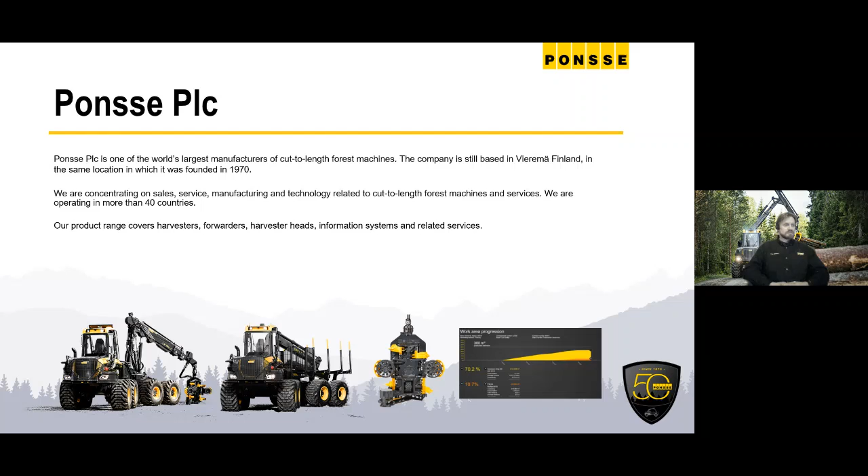I will shut my camera at this point so you will get the full focus. We're a 50-year-old company, and through all our history we have focused only on CTL forest machinery. That's all we do, and that's where we excel. We are one of the biggest CTL machine manufacturers in the world, actually. So big influence - we operate in about 40 countries worldwide. Wherever there is industrial logging, we are pretty much there. Service, sales, manufacturing, and all kinds of technology related to CTL forest machines and services.

So that's our background. Our product range covers harvesters, you can see on the left hand side, a wide range of harvester models. Then forwarders, harvester heads, and also a big selection of computer applications and software products for different kinds of use. That's obviously important in the modern world to support information technology.

Then the actual topic, Ponsse firefighting equipment. Basically, we're talking about a forwarder-mounted fire suppression device that utilizes the excellent features of a Ponsse forwarder. We're mounting this external firefighting equipment on a standard forwarder. The design has been done in close cooperation with the local Department of Emergency Services, firefighters here in Finland, and actually the idea came from them - they needed something to tackle the problem of fighting wildfires in forests in difficult terrain. And here we have the solution now.

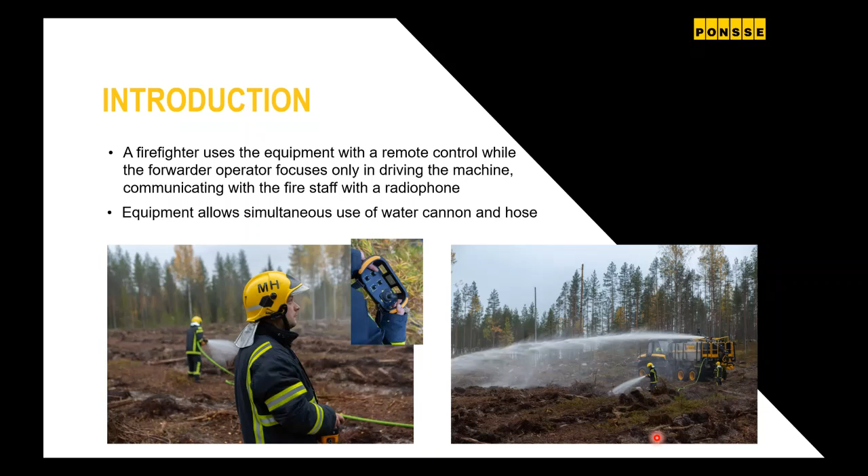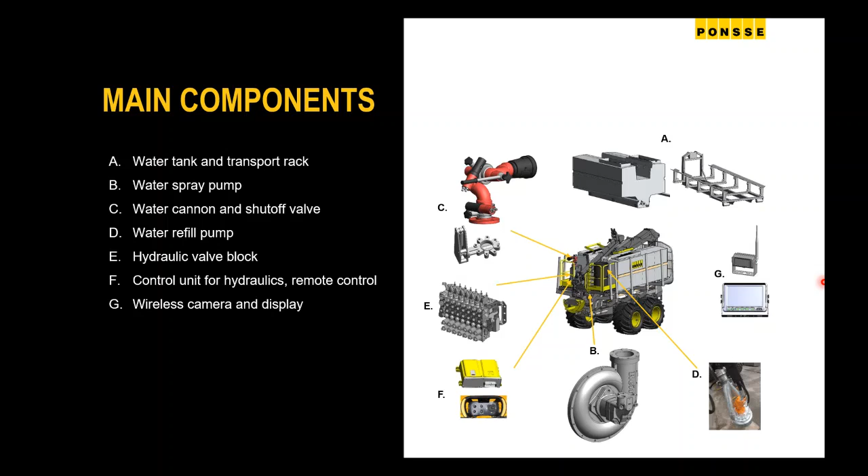Available base machines for the unit are Ponsse Buffalo, Buffalo King, Buffalo Active Frame, so all models of Ponsse Buffalo, plus Elephant and Elephant King, including all optional models like Active Frame. Loader minimum is Ponsse K90 Plus, or the older Ponsse K90 loader or a bigger one, since you need enough power to lift it on top of the load space.

Hydraulic system requirements: oil flow minimum 100 liters per minute or 26.5 gallons per minute, pressure minimum 235 bar or 3,410 psi, and minimum load space width is 2.76 meters or 108 inches. That's the minimum load space of the Buffalo, so it fits all the different optional load spaces.

Esko, if you have any comments, please fill in whenever you need. And we're not... sorry. Now I have a voice.

Yes, the Bison. You don't see the Bison on the list, and the reason is that the Bison has a different type of hydraulic system and needs to be checked first, our R&D is working on that all the time. Maybe a bit later it will be possible to install, but not yet today.

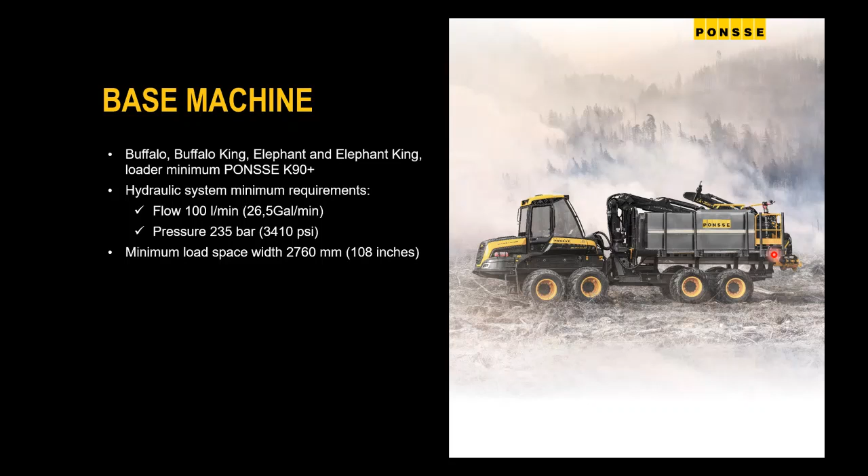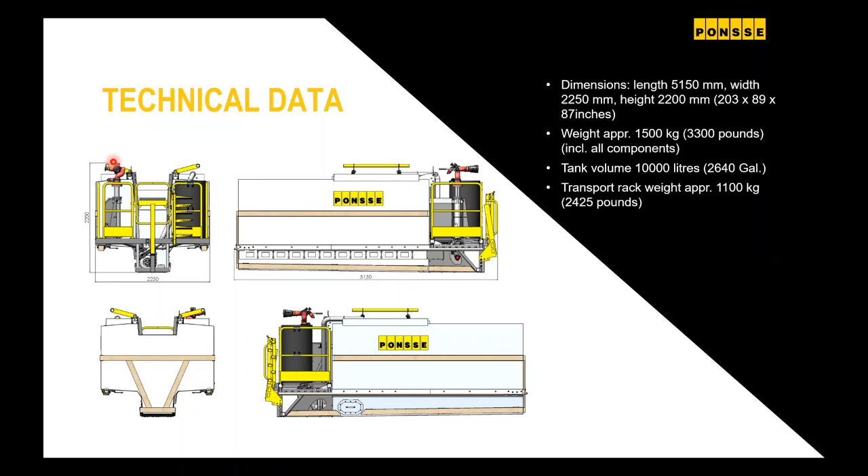This readiness kit is available from the factory as an option for a forwarder. When ordering a new forwarder, you can order it with this readiness, so it will have all the connectors needed for the firefighting equipment. For existing machines, you can buy a kit from Ponsse spare parts, which is easy to mount, making it very easy and fast to attach the unit. It takes approximately 10 to 15 minutes to mount the tank and connect it to the hydraulics and electrics, and then it's ready to work.

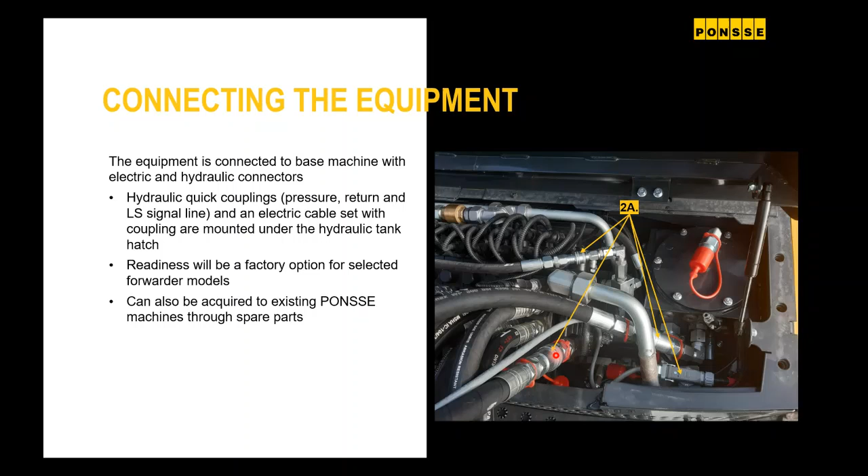The capacity of the tank is 10,000 liters. It's built out of lightweight aluminium, so it's possible to lift it onto the load space with the own loader of the forwarder. It needs some lifting power, but we have it in the Ponsse K90, which is the smallest loader you can get in the Buffalo. So with the Buffalo, you will be okay.

This is a special aluminium. It can withstand chemicals and even salt water, seawater, if you're using that. There's different qualities of aluminium, and this is one of the good ones.

It's reinforced with baffle plates and reinforcement plates from inside, making the structure significantly stronger. Also, when driving with that huge amount of water in uneven terrain, it's good to have the baffle plates so the water is not moving around and splashing in the tank, causing swaying and stresses for the system.

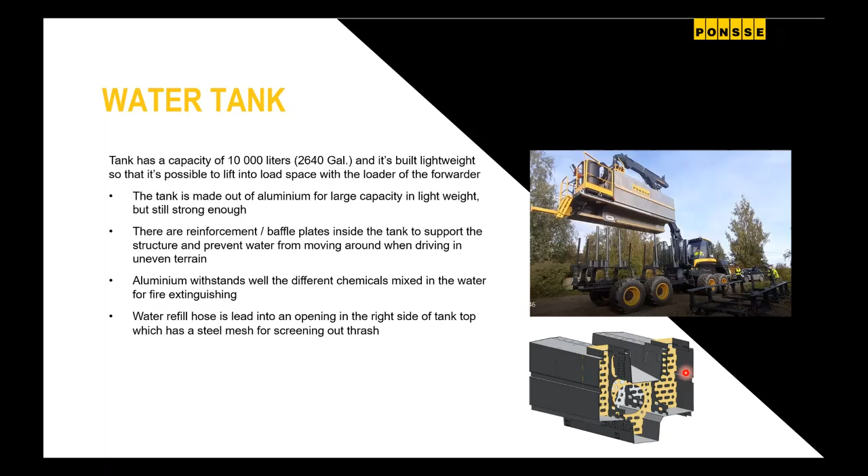The water refill hose is led into the big opening on the right side of the tank top, and there's a steel mesh - I have a better picture of that coming later - screening out the biggest trash, moss or stuff like that. Here we have a picture in the bottom right corner. There are big gaps or openings on both sides of the tank for refilling. There might be other methods of refilling the tank occasionally, so it's good to have these big openings.

The built-in refill pump uses a pipe coming in over here to the right side gap, and there's a steel grid or steel mesh screening out the bigger junk.

It can be drained empty through a valve in the rear, down here, the yellow one - there's a big tap. You can open it and drain the tank empty when needed, for example for transportation, or maybe you're cleaning it. It can be flushed clean by opening the screening grid over here and spraying it with water, hosing it clean, then opening the tap and letting the impurities and dirty water flow out.

When the equipment is stored, it's good to cover the openings on top with some cover, maybe plywood or whatever means, so that no impurities go into the tank during storing, especially if you're storing it outside. It would be really advised to close the hatches.

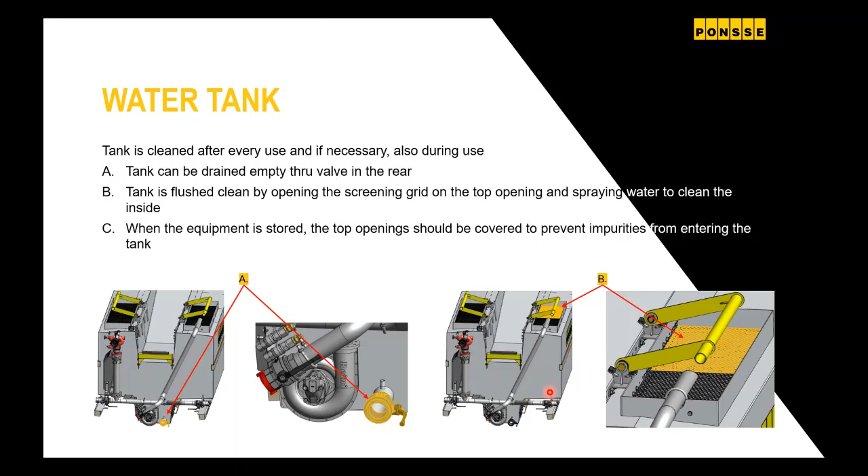Then the spray pump - this is the pump spraying water into the water cannon and to the hoses if those are used. Built in Finland by Reini company, model PP3 centrifugal impeller pump. Maximum flow is 950 liters per minute, 250 gallons per minute, and maximum pressure is 14 bar, but typically we use lower pressure depending on the water cannon nozzle setting.

The pump is run by a hydraulic motor that takes power from loader hydraulics, so we have very powerful hydraulics backing up the operation. It's a Parker F11 series 10 cubic centimeter piston motor, very widely used, robust, really powerful motor, used for example in harvester saw units.

Maximum pressure is 350 bars or 5080 psi. We are using loader pumps with maximum pressure of 265 bar or 3840 psi, and oil flow maximum is 102 liters per minute, 27 gallons per minute - easily enough in the forwarder that we are using.

The spray pump is corrosion resistant, so you can use seawater, salt water, or the typical chemicals that might be used for firefighting. When it's not in use, it's important to protect the pump from freezing, so there are good instructions in the user manual for doing that.

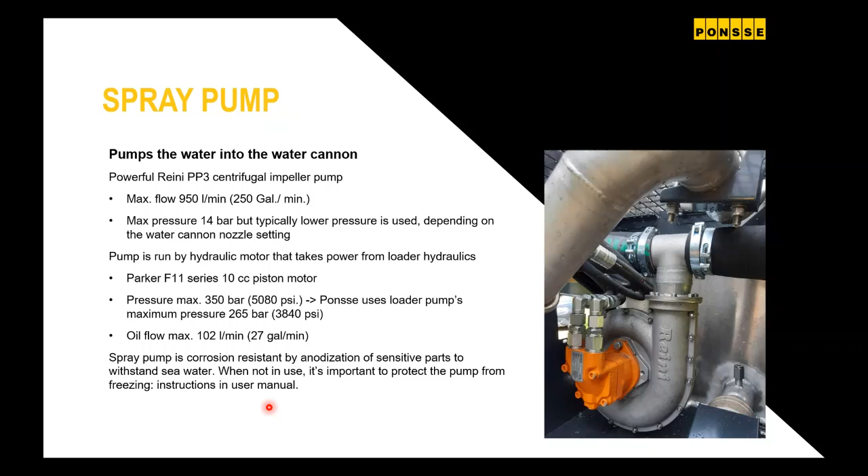Then the water cannon - like I said earlier, it's purpose-built for firefighting. Hydraulically controlled TR75 SHK, also built here in Finland. High quality pump, and all the functions except the choke in the nozzle are operated hydraulically with a remote control. We have hydraulic actuators for turning and the elevation angle of the water cannon, as well as the nozzle setting, so you can spread the spray form from point jet to mist function with the remote control. Basically you can do everything needed in normal firefighting work with the remote control.

If you see on this show your pointer, there's rotating hydraulics and the height hydraulics. Here is the actuator for rotation, then here for elevating up and down the nozzle, and this one for adjusting the nozzle for different forms of the jet or the spray.

I'll show in the coming pages the nozzle setting, the choke, but depending on that position, the spray range of water has been in our tests between 35 and 47 meters, so 38 to 51 yards - a very long range that you can reach with the point spray. You can really effectively use this from a clear distance from the fire, staying safe almost 50 meters away.

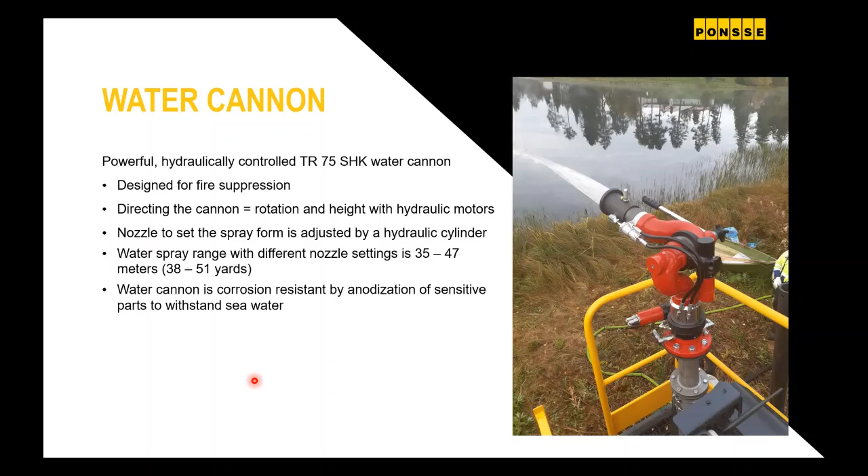The nozzle setting is hydraulically operated and sets the form. So point jet obviously reaches much longer distance, and then the spray like this, like a mist setting, you can create for example a protective mist to protect from the heat of the fire.

Here's the nozzle choke. There are 3 different positions. You can see here it says the settings in liters per minute and gallons per minute for every setting. That's making the choke narrower or wider, and that affects the pressure of the water flowing out, which affects the range but also the amount. So a smaller amount of water but longer reach with a tighter choke, and more water with a little less range with a wider choke.

This left picture shows very well - if you go back to these spraying areas, spraying very close to the machine means like a water wall between the fire and the machine, and this works to decrease the temperature near the machine very well.

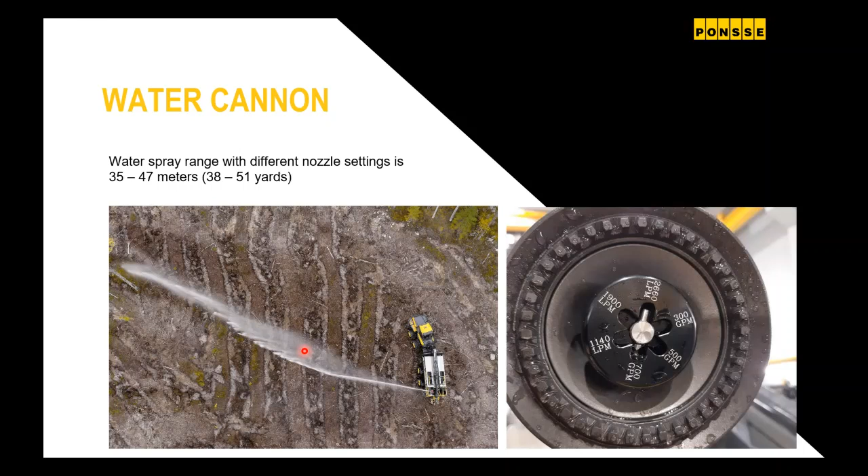Then refilling - maybe the most typical way of refilling is with the own built-in refill pump, manufactured by Reini Model S1, powered by the base machine's work hydraulics like the spray pump also.

Filling takes about 6 to 7 minutes depending on the height, even though the maximum flow in optimal conditions of the pump is 3,000 liters per minute, and we have a 10,000 liter tank, but it's always the length of the hose and the lifting height of water that affects it. So in normal conditions, it's been about 6 to 7 minutes.

You can refill it from a natural water source like a lake, pond, river, spring, whatever is available. Or of course, we'll show later if you supply water in different kinds of tanks or trucks.

There's a lifting bar for the pump, so you lift it into the water source with the grapple and the loader of the forwarder. It's a submersible centrifugal pump run with a hydraulic motor, and this pump is actually quite insensitive to impurities, mud, or even sand - they go through it really well.

It's actually the same pump that's also used for dredging, pumping soil from the bottom of water, so it can really do it. But in this operation, it's advisable to hold it a little bit clear from the bottom with the loader. It's really easy to adjust the height with the loader, so you can lower it, find the bottom, and lift it up a little bit so that it's not sucking the impurities and dirt from the bottom of the water. That keeps the water cleaner and protects the spray pump.

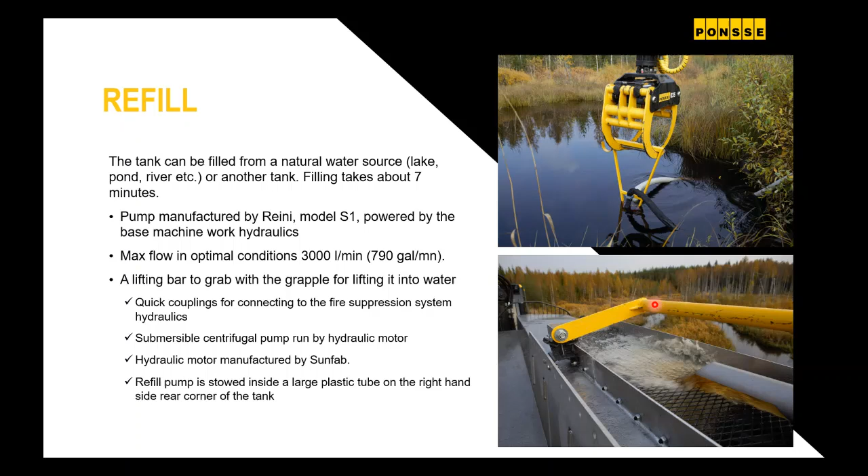And here in the back of the tank, there's a black plastic container where you can stow the pump and the hose when it's not in use, and from there you lift it with the grapple and place it in the water. Obviously, quick coupling for the hose on the back side of the tank over here, where you connect the hose for refilling.

And then there's a strainer basket in the bottom, you can barely see it from this picture, in the bottom of the pump. So this is protecting from impurities and sand and mud entering the input hose and the pump. But like I said earlier, it's still good to hold it away from the bottom, and it's easy to do so with the loader.

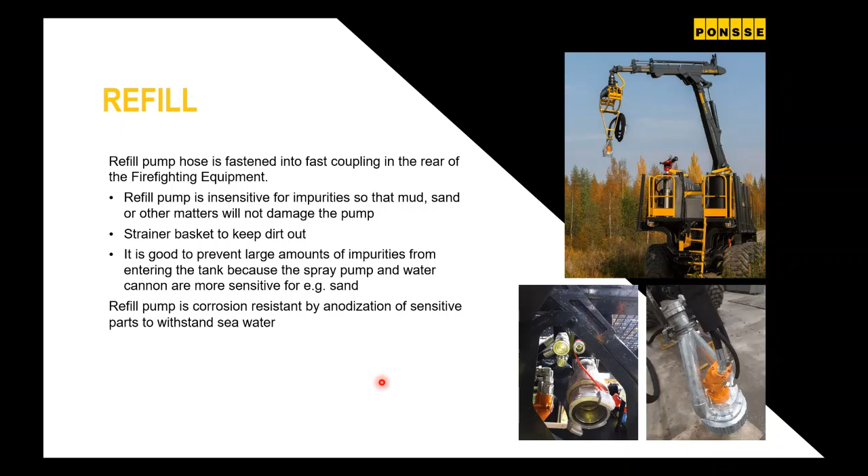Also, this pump is corrosion resistant, so it's insensitive to seawater or chemicals. The other possibility, of course, is to refill from a tank.

So you can bring water to the fire site with a fire engine or any other tanker, or of course you can also lower tanks and place them in the ground. So it's possible to refill this also with the pump of the fire engine. Then you just connect the hose to the refill connector in the back and pump the water in.

It's good to understand that the refill is quite fast, and even driving in difficult terrains is fast with this kind of special equipment. We have a machine that's purposely built for effective driving in all kinds of terrains.

And then the spray pump is very effective. So especially if you're using both the cannon and one or two hoses, emptying the tank is really fast also. It might take only 10 minutes. So we could have a cycle of only, let's say, 30 minutes for emptying 10,000 liters of water.

So in very intensive use, you really need a lot of water supply available if you want to be effective. If there is no natural water source, you need a lot of water transported to the site to fully utilize the capacity of this system.

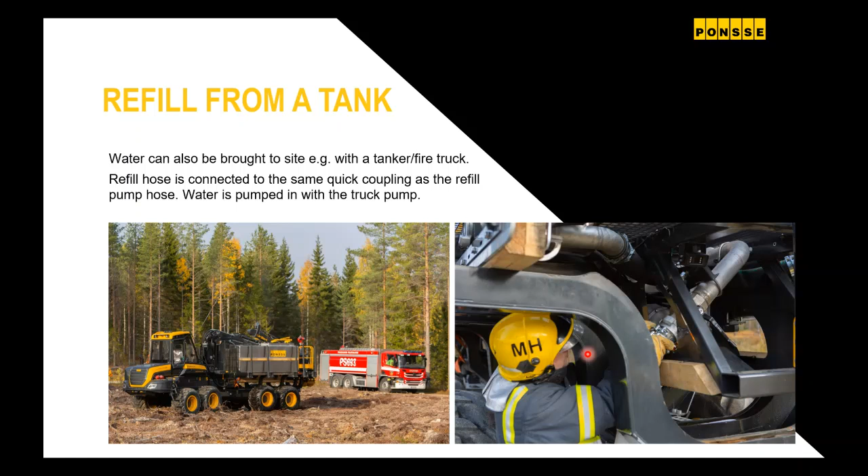Hydraulic valve, again in the back of the tank, in the rear, directional valve block to control the fire suppression system functions. All of them are operated hydraulically. It's a Parker L90 load sensing 7-spool valve block with individual maximum pressure settings for all the functions.

And pressure, tank and load sensing lines are connected with quick couplings in the base machine, and then electric connection too, and that's all the connections needed.

Obviously the tank is tied to the base machine with a steel chain, so it's secured into the load space that way. And the hydraulic connectors are impossible to connect wrong, because the pressure and tank lines are the opposite way around, the male and female connectors, and then the load sensing line connector is smaller, so there's only one way you can connect these.

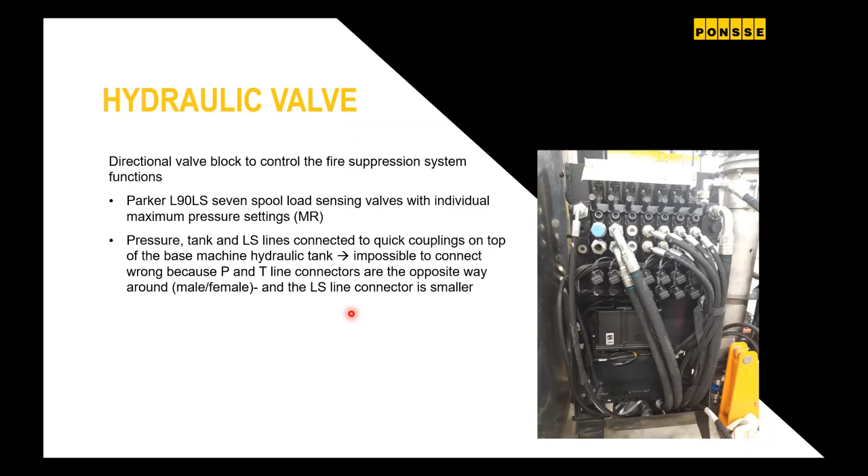And then the control module, which is located right under the valve block to minimize the wiring, so it's basically a reliability thing right there. This unit controls all the functions of the system, so the hydraulic functions. Manufactured by Teleradio, a Swedish manufacturer, powered by the base machine's 24-volt electric system.

Well protected inside the casing, as you can see here.

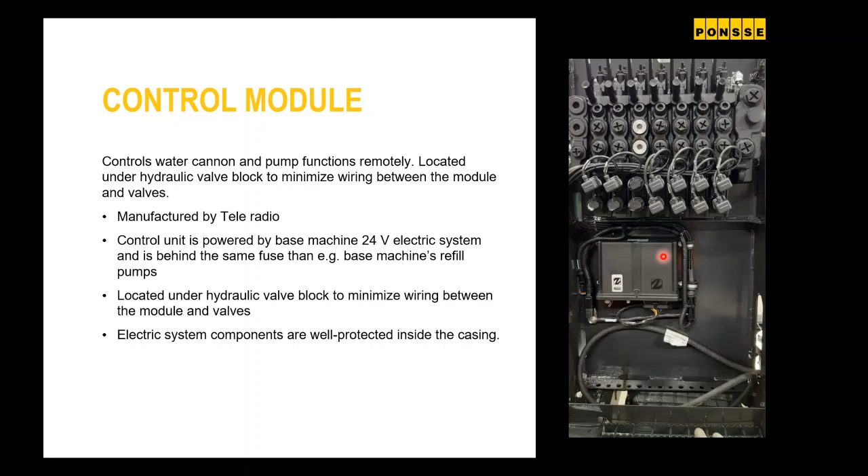And then the remote control, same manufacturer, Teleradio, Swedish built, really simple and easy to use. You have a strap, you can hook it around your neck and then hang it in front of you and operate it with both hands.

And switches are here, this knob for refill pump, then spray pump, and those are turnable knobs so you can adjust steplessly the flow of the pumps. Then there's a joystick, you can see better from this picture, for aiming the water cannon. Really easy and logical. Then nozzle adjusting with 2 buttons at the end.

Water valve control with this one here, so this shuts the valve or opens it to the water cannon. Stop button at the end, so you can stop the whole system with this main switch over here.

And then you have a small display showing the status of connection and the battery and so on in front of the unit. It operates at 2.4 gigahertz frequency, same as Wi-Fi, basically like a Wi-Fi connection.

Range is 100 meters, and there's a rechargeable and changeable battery. It's really easy to change a new battery. The manufacturer has estimated that in intensive, non-stop use, the battery basically lasts up to 8 hours. So it's really long operating battery.

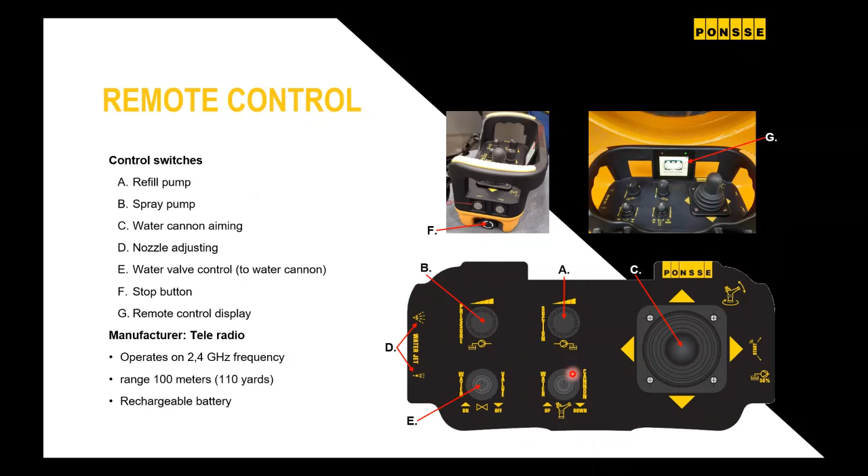The remote control and the control unit, the base machine unit, are paired, like you pair your smartphone with your car, for example, so that if there's another similar system, remote control, used in the same area, in a close area, they don't affect each other. So you can operate a number of Ponsse firefighting equipment remote controls in the same area, and they don't interfere with each other.

If there is a lot of radio traffic on the same frequency in the area, like a strong broadcast all the time, compromising this communication, then the system would automatically shut itself down. But this is an untypical or improbable event, and there's a safety feature for that too. The battery lasts up to 8 hours in intensive use, and the status is shown in the display, so the operator can see the situation and quickly change the battery when needed.

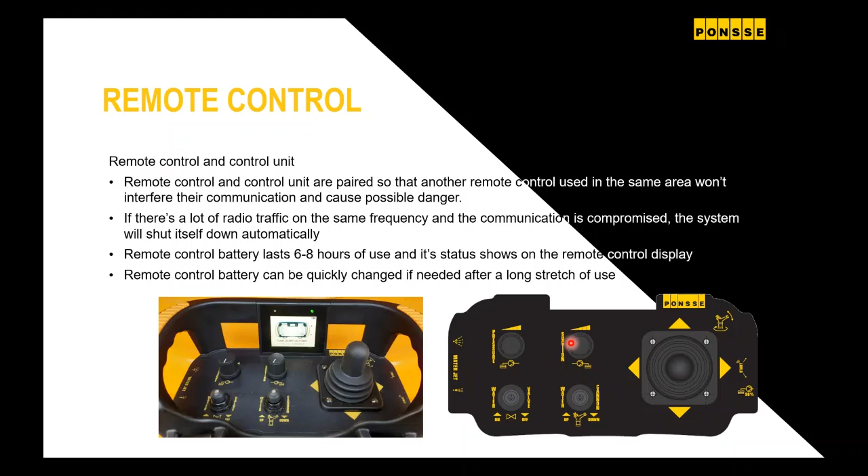Then the final component, the reversing camera. It's a wireless unit, and the camera is behind the tank so you can see what's behind the machine. That's also an important safety feature, since the firefighter is walking on the ground around the machine, so it's important the operator sees if somebody is behind the tank. It also makes it easier to grab the grapple on this yellow steel bar here, so when driving with the machine you should hook it there so the crane or loader stays in the transport position nicely and firmly.

Inside the cabin, the display is mounted with a suction cup, for example, in the window, giving a good clear image for the operator. This is, of course, a safety feature along with the radio phone connection, the walkie-talkie connection between the operator of the machine and the firefighter.

Okay, sorry Antti, yes. And sorry, this cabin, we needed to remember this. We have this safety cabin, but only one person. Yeah. Yes.

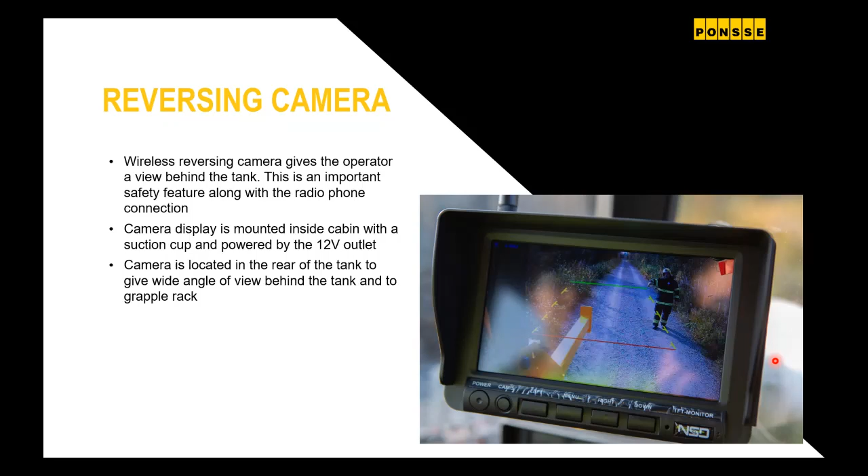Okay, this is a use case or example of use, and this is how it's done in Finland. This tank equipment has actually been in operational use already last summer here in Finland in a forest fire. The fire department owns the firefighting equipment, and they store it in different locations around the country on the transport rack, ready to work. Then the fire department contracts local logging contractors who own appropriate Ponsse forwarders, Buffalos or bigger ones.

Whenever firefighting equipment is needed, the tank is transported to the area by the fire department, and the forwarder is transported to the same place by the logging contractor. He lifts the tank up, fastens it with chains, hooks up the hydraulics and electrics, fills the tank, and it's ready to work.

That's basically the idea. It's always professional, trained firefighters who are responsible for using the firefighting equipment, while a professional forwarder operator drives the machine. He knows what kind of places he can drive, and the features and requirements of the machine when driving loaded with a heavy water tank. So professionals run both operations, communicating with each other via radio phones, which is a really effective way to work.